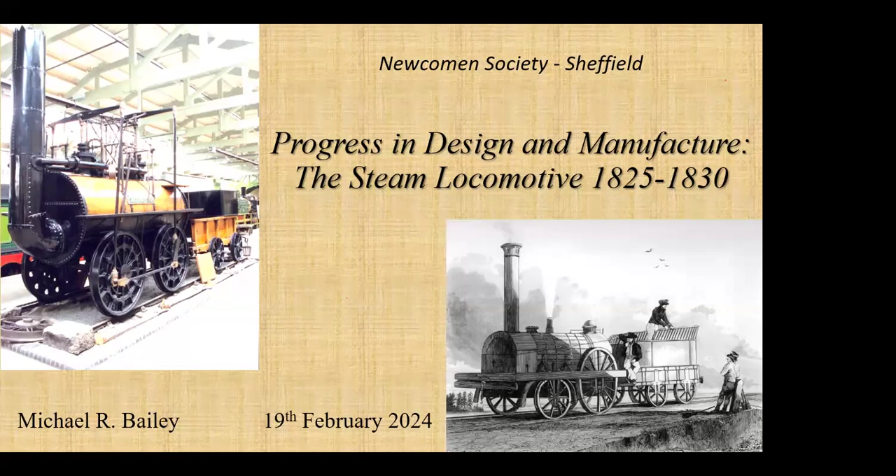So this is very much the story of Robert Stephenson and Company of Newcastle upon Tyne, because they were started up during this period, and they played a very large part, not exclusive, but very large part in this evening's story.

It's a cylindrical boiler with a flue passing through from the rear, where the fire grate is, to the leading end, leading up to the chimney, with 2 vertical cylinders set to the crown of the boiler, and the vertical action of the piston transmitted through crossheads guided by slide bars. The 2 cylinder actions are coordinated by the so-called endless chain, which links the 2 axles together, to stop the 2 cylinders getting out of sync.

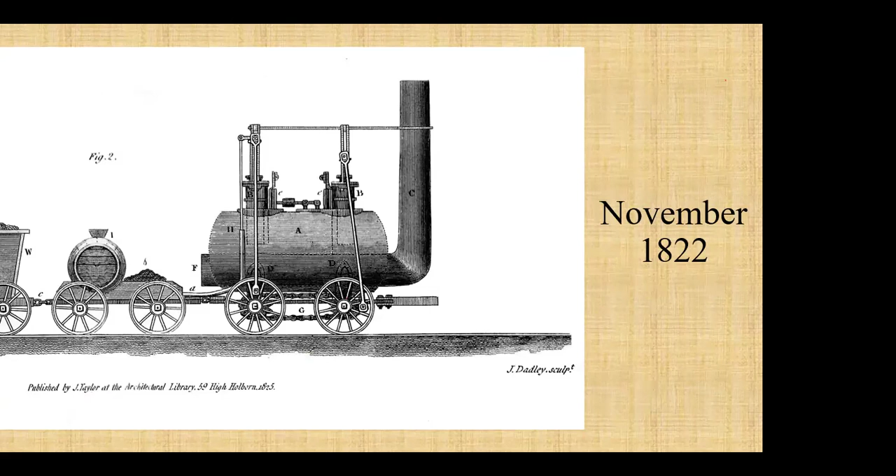So the Hetton colliery, a contemporary illustration of the Hetton colliery locomotive, again with the characteristics that we saw in the earlier one. The other point, incidentally, is that we're not using any springs other than the so-called steam springs, which Stephenson had introduced on the Killingworth line in the 18 teens. So they were still in use on the colliery line. We learned a lot about the Hetton colliery locomotives when we looked at the Hetton locomotive based at the Locomotion Museum in Shildon in County Durham.

In anticipation of the startup of the Stockton and Darlington Railway, there clearly was demand identified for manufacturing railway equipment, including and especially locomotives. And so the Robert Stephenson Company was formed in June of 1823. At first, they undertook contract work for customers at the Bedlington Ironworks, because the manager there was also a partner in the Stephenson company.

They leased land, I should say, just off Forth Street in Newcastle, and they began to build and fit out initial workshops between October of 1823 and August of 1824. To begin with, they had about 40 smiths, machinists, and fitters, and shortly after the works were declared open and in full use, the Stockton and Darlington Railway ordered their first 2 locomotives from the company on the 16th of September 1824. They ordered 2 locomotives. The good news.

The bad news is that they hadn't got a manager, because Robert Stephenson was in South America and George Stephenson suddenly became extremely busy because so many people approached him to undertake schemes for railways in various parts of the country, and he refused to say no. He kept saying yes, and therefore he burdened himself with an enormous amount of work. So George Stephenson wasn't on hand to supervise the beginning of the work on the locomotives.

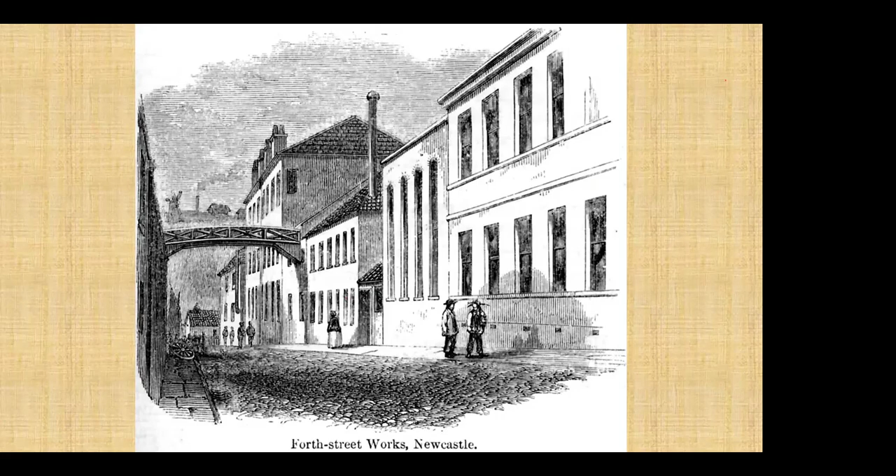James Kennedy was the other person that George Stephenson approached. He was a Scottish millwright who had quite a lot of experience with the fitting out of steam engines, which were marine engines on board various ships. And he was undertaking this work in Liverpool and other northwest ports. George Stephenson approached him and said he could do with someone of Kennedy's experience. Would he please come to Forth Street and undertake the work of manager to carry out the first orders that the company was receiving. So from that moment on, once Kennedy was installed, communication with Stephenson was by written word.

This remarkable drawing survives in the Tyne and Wear Archives. It is not only the first locomotive drawing that we know of, but it is also particularly important because it is a pre-production sketch, I should say, of a locomotive. It's written in Stephenson's own hand, and one imagines that he also prepared all the sketches that you can see there. What he was trying to convey with this amazing drawing is that he would like to coordinate the action of the pistons by using parallel motion rather than relying on the endless chain that had been the case with the previous locomotives that we looked at.

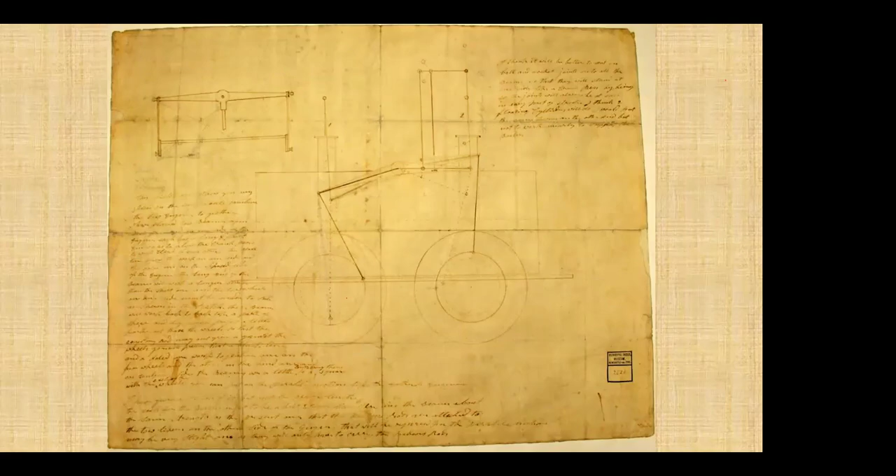Kennedy was left to interpret what it was that Stephenson was seeking to do. Not easy; you can't just use a sketch like this and suddenly produce a locomotive that fits all those requirements. The next drawing that has remarkably survived is another pre-production sketch. It was prepared almost certainly in 1824. Now, this is preserved in the National Railway Museum in York. It shows two alternative arrangements for parallel motion. On the left side is William Freemantle's grasshopper motion, and on the right-hand side is James Watt's parallel motion.

There is no text that accompanies this drawing, or none that has survived. And so we are left to wonder who prepared it. It is my belief that it was prepared at Newcastle to send to Stephenson with an accompanying letter saying, which one do you want? Which presumably means that Kennedy was the drawer of this drawing. Now, it could have been Timothy Hackworth, but we have no historical record confirming either way who produced it.

The parallel motion was his attempt to interpret Stephenson's requirement. It does away with the endless chain and provides the link between the two driving axles with coupling rods. But there are no springs indicated. In other words, they sought to abandon the steam spring. Therefore, how would they overcome the problems of the uncertain track of the Stockton and Darlington line?

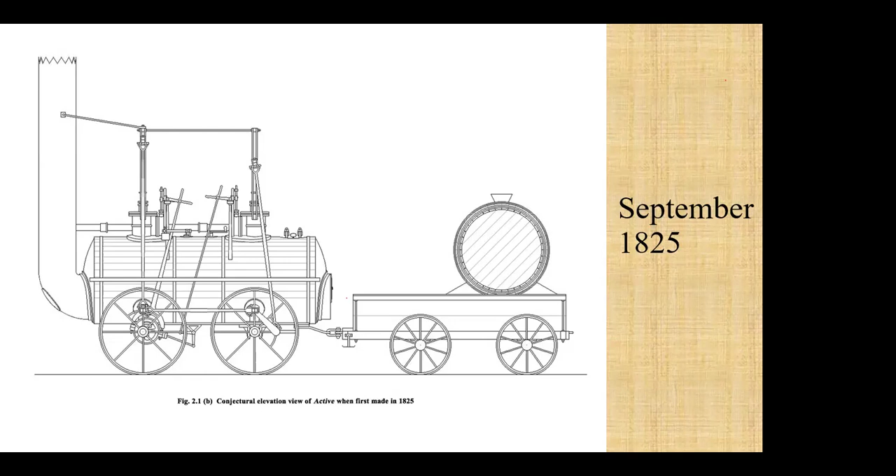Now, you cannot take sketches and use that as evidence, but it is comforting to think that the guys who were there on that opening day actually chose to illustrate the locomotives in this way. So it drew about 80 tons and it carried about 700 passengers. These are the accounts of the day that we've fallen back on. It drew 30 wagons between Darlington and Stockton, and on its approach to Stockton downhill, it actually achieved 15 or

16 miles per hour. Now, a great deal of this success was down to George Stephenson's elder brother, James. James was an experienced driver who had been at Killingworth, moved across to the Stockton and Darlington to set up the driving skill on the S&D, and no doubt chose to teach new drivers to supplement the work that he was doing to build a force of drivers for the growing railway company.

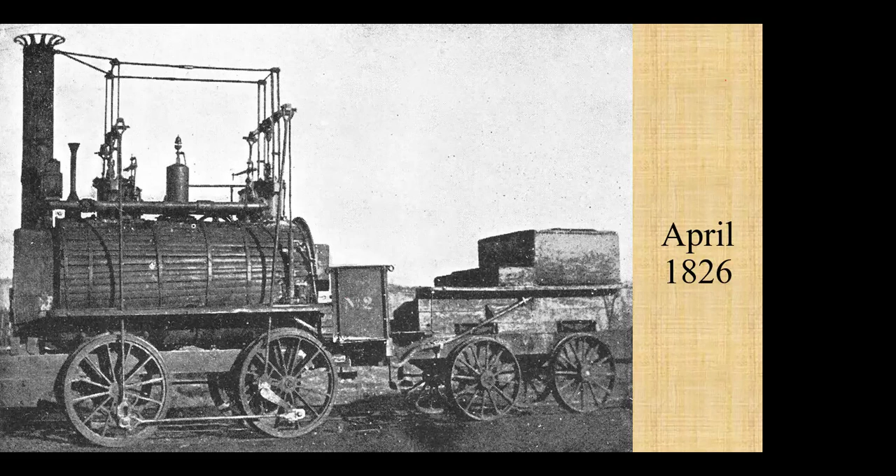I'm going to read to you two extracts from the minutes of the directors' subcommittee. The first quote is shortly after this loco arrived, just a couple of days. "This committee feel very much dissatisfied with the manner in which Messrs. Stephenson and Company have delivered the last locomotive engine on account of its imperfect state, the smiths having been employed a whole week before it could be got to work." That's a pretty damning indication that was communicated to the Stephenson Company.

And the second quote, just a week or two later, the directors requested that Robert Stephenson and Company, in any engines they may furnish us with, not send any engines with new and experimental apparatus, but such fitting up as has been tried and approved already. So they were in deep trouble because the geometry of the parallel motion had not been proved.

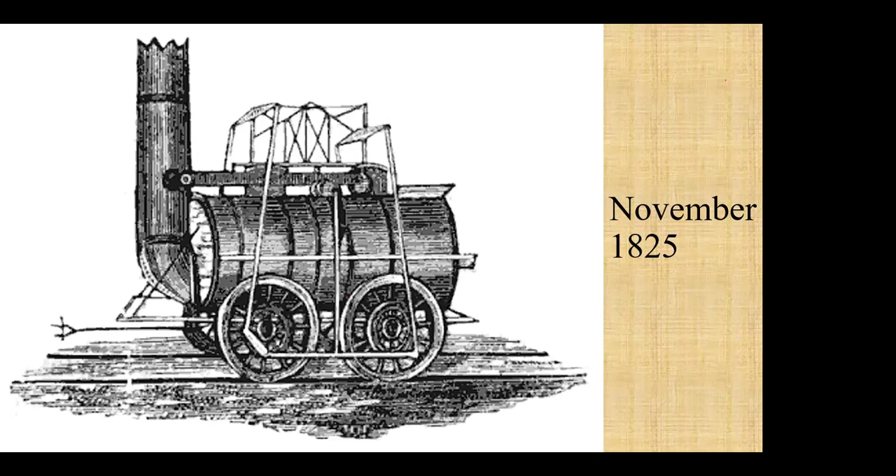Not only the geometry of that, but also if we take fairly closely what the artist has shown us here, the valve motion driven by the connecting rod, rising up from the center of the connecting rod, is also fitted to the top side of the boiler in a way that looks questionable, to say the least. So they had a lot of problems. They managed to fix it eventually, but it left a sour taste in the mouth between the company and the manufacturer.

Now, this drawing has been prepared by Ernest Forward, who was the curator at the Science Museum in the 1920s and 1930s. He did a lot of research into the early locomotives, particularly numbers 3 to 5. There were 5 locos in all. His best interpretation is shown in this drawing, which was published in the Engineer in October of 1941.

Now, he's indicated some of the wheel improvements. I'll come back to that subject. He's shown the tilting sleeve for the rear axle and various other components, which more or less fit in with what we now see on the locomotive as it has survived.

The reliability of locos was totally dependent upon the drivers and the maintenance men. James Stephenson again led the way. He managed to drive not only the first locomotive, which, by the way, was known by all the drivers as the Active. That was the name. It didn't carry that name, but certainly the drivers called it the Active. And that was a name that stuck all the way through its working life, right through until its preserved life. It was always known as the Active.

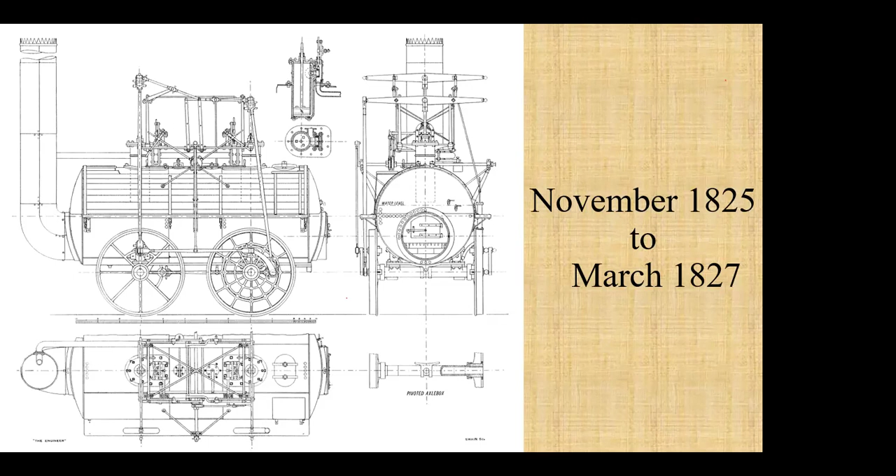Sadly, we're not allowed to look at the outside plates of the boiler because allegedly it has got asbestos dust. Heaven only knows where the dust could have come from, but that is what was said by the NRM. Therefore, we had to live with it and examined the boiler from the inside. And it's that difficult. You have to bury your head inside the boiler and use a telephone camera on a selfie stick. Believe you me, that's very difficult to do, to gain as much knowledge as we can about the formation of the boiler.

Now, in this view, the center of the illustration is the crown center line, and the left and right sides are the bottom center line of the loco. So the whole thing has been flattened out to illustrate the formation of the boiler. Now, the method of construction was that the boiler plates were longitudinal, and with each ring, as it was built up, the plates were riveted to the outside of the previous edge. And it was gradually rolled and new plates riveted. So you get this progressive, I hesitate to call it cylinder, because by the time you've overlapped 7 times to go round, it's not cylindrical. And that really is the point. It was a peculiar shape, not cylindrical. And therefore, nothing fits precisely.

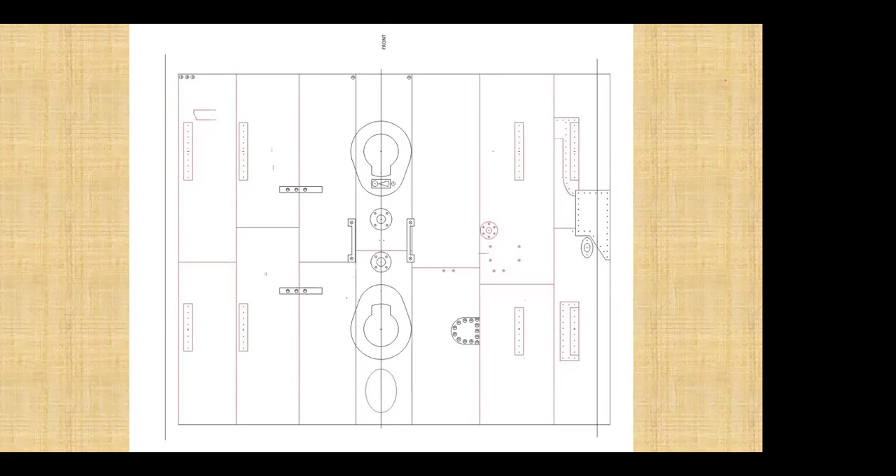Now, so much for the initial engines that by the time we get to the November of 1827, a new form of locomotive appeared from the Stephenson Company. There's very little in the way of paperwork to accompany this drawing. It could be that Timothy Hackworth initiated this different approach, because it was fundamentally different. The cylinders are buried into the rear plate of the boiler, working horizontally rather than the twin cylinders in the crown, as we saw previously.

So the whole geometry is totally different, and the drive is on the leading axle only. The rear axle is an axle which is coupled to the driving axle. Fine, this was all very well, but when it was delivered, it was found to be too heavy. It was too ambitious. And the Stockton and Darlington, and Timothy Hackworth in particular, had to decline the engine and ask for it to be taken back and rebuilt with a third axle. And so it didn't operate for very long before they reached that conclusion.

Now, I should say that throughout these early years, there were difficulties with the weight of each of the locomotives, and also with the state of the track. It needed a great deal of maintenance. It was being punished by the action of the steam locomotives.

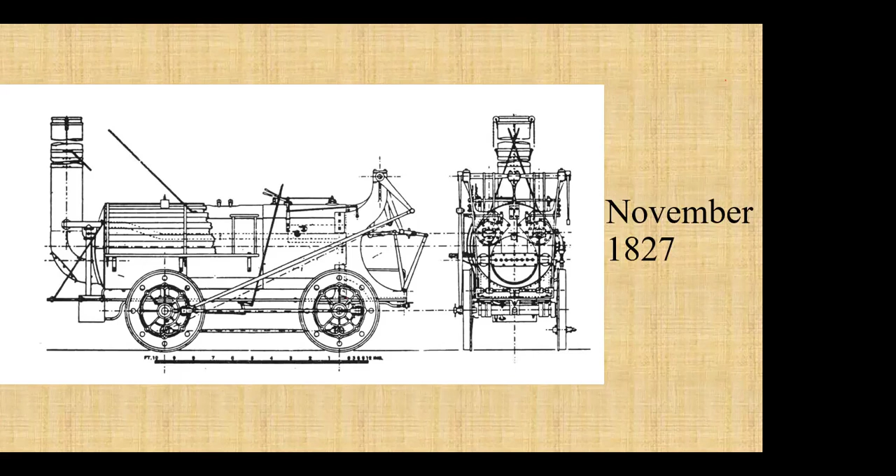So that takes us to the end of 1827, and then a remarkable event took place, and that is that Robert Stephenson came home from America. George Stephenson, his father, was so pleased to see him because he could take over from his father the development work of the locomotive so desperately needed. And so, having shed himself of his concluding responsibilities from his work in South America, from the January of 1828, he took on from his father the responsibility for developing the locomotive for the forthcoming mainline purposes, in addition to the freight purposes on the Stockton and Darlington and the railways.

Robert Stephenson, a very, very talented engineer, began what today we would call a research and development program, in which he would investigate each aspect of the locomotive on its own and try to improve what it did and how it did it. This is in marked contrast to his father, who always took an empirical move to try and improve things. George Stephenson would say, if it works, well, do it again, but do it bigger. Whereas Robert Stephenson said, how are we going to improve the locomotive?

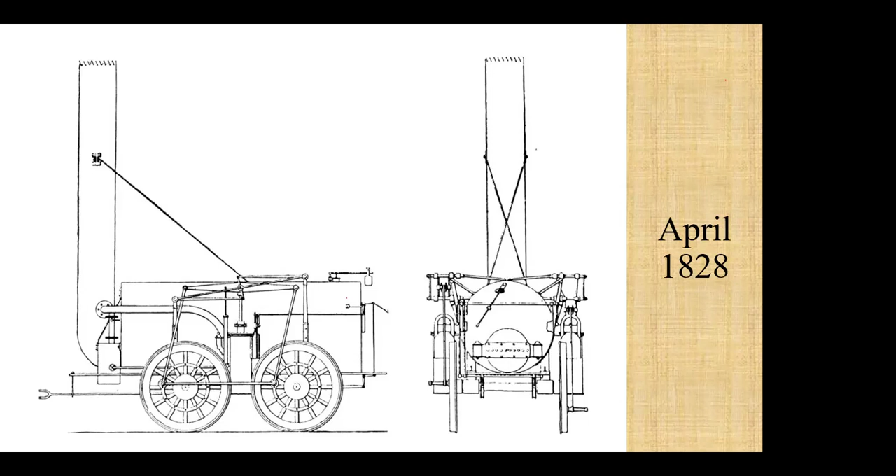The next loco with which Stephenson had the opportunity of trying out his ideas was the loco that was destined originally for the Liverpool and Manchester Railway, but subsequently went to the Bolton and Leigh Railway. This is the Lancashire Witch. And the Witch introduced something which is brand new and very important, and that is plate springs.

Now, plate springs had been first used on the Killingworth wagonway. They were tried out on one of the wagons there to see how they worked and how robust they were. They did work, very successfully. In fact, so successfully that the first person who asked to go and see them was Timothy Hackworth. And we even have his expenses claim for going to Killingworth to see the plate springs. And they were adopted by the Stockton and Darlington Railway and also on the Lancashire Witch.

The locomotive here has two flues, not a return flue in the way that I'll explain just coming up, but two quite distinct flues in parallel with each other. And the flue gases were gathered together at the front end into one bulbous chamber that fed then to the chimney. Again, it's got wooden wheels with the wrought iron crank ring.

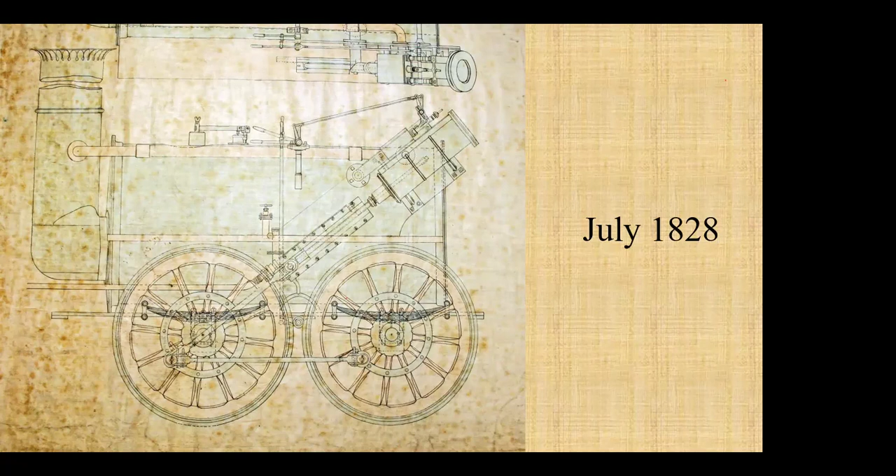The other person that I've got to mention, because he's so important, is William Hutchinson, who was the leading foreman at the Newcastle factory. In fact, I think today we might call him the works manager, but he really was a very experienced man. So he was able to carry out some of Stephenson's ideas by saying to Stephenson, I can manufacture this, but I can't manufacture that. We can do this, we cannot do that. And the three of them, the designer, the leading foreman, and Stephenson himself, formed a kind of triumvirate for all this development work. And this is some of the fruits of their work.

Now, for another most important part of the story, we've got to take a step back to November of 1827, to the work that Timothy Hackworth was doing. Hackworth was the locomotive superintendent of the line, and therefore responsible for the engineering of its locomotives. And a locomotive was offered for trial from the outset of the line in 1825-26. This was a locomotive also built in Newcastle and was known by the men, I suspect, by the sort of noise it made. It's called the Chittaprat.

It was unusual in as much as it had four outside cylinders. It kind of worked, but I think the maintenance was a bit excessive. And so Timothy Hackworth declined to accept it, but kept the engine. I don't know what the arrangements were, but he kept the engine. And what impressed him so much was the boiler, because the boiler had a return flue, and this increased the heating surface available for use with the loco quite considerably.

So what he said is, right, I'm going to use this boiler. I'm going to extend it by adding another ring to the front end, and I'm going to place it on six wheels rather than the four wheels that the Chittaprat had come with. And so this is the loco that was drawn at the time. You can see the return flue arrangement that it's got there. You can see the vertical outside cylinders, and you can see also something else that he borrowed off the Chittaprat, and that is the two-part wheels.

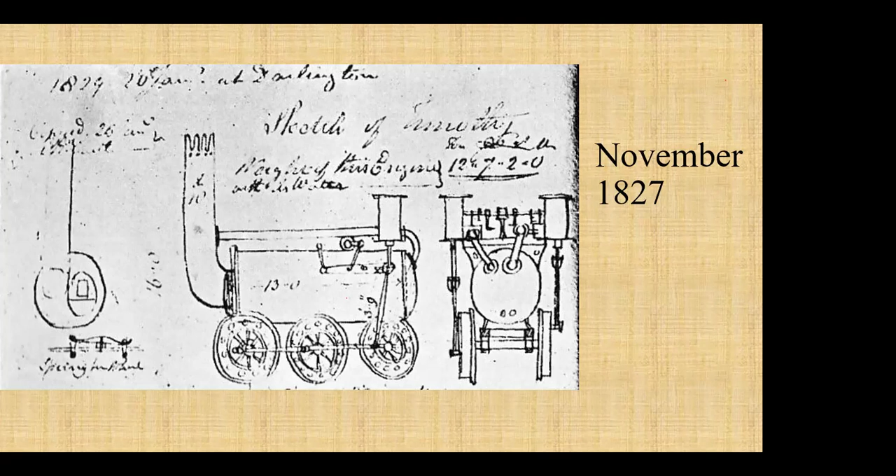Now, all this is by way of introducing what happened to our old friend, the Active, the locomotive that started the Stockton and Darlington line. Because in the July of 1828, the boiler failed badly. The flue and the boiler barrel were badly damaged, and sadly, the driver, John Cree, was killed. This was on the 1st of July, 1828.

So Hackworth then had the decision to make. What should he do with it? Should he just scrap it or try something else to replace that badly damaged boiler? He decided that on the basis of the increased heating surface of the Royal George, that he would replace the boiler on what had then become number one and replace it with two return flues.

Now, this really is brave because, yes, you get a much increased heating surface, but somehow you had to understand how to fit two return flues into the boiler. There wasn't much room. The original boiler was 4 feet in diameter. And so he went to Newcastle for discussions with the Stephenson Company, or no doubt with the boilermakers themselves, and said, this is what I want to do.

And they played around with it for quite a little while and came up with the idea of putting on a replacement boiler, which was slightly larger, 4 feet 6 inches diameter. And this enabled them to have enough room inside the boiler at the return end of coming back with two return flues. And it's in this form. This is the way that Peter Davidson, who prepared all these drawings, it shows how it could fit within that diameter boiler.

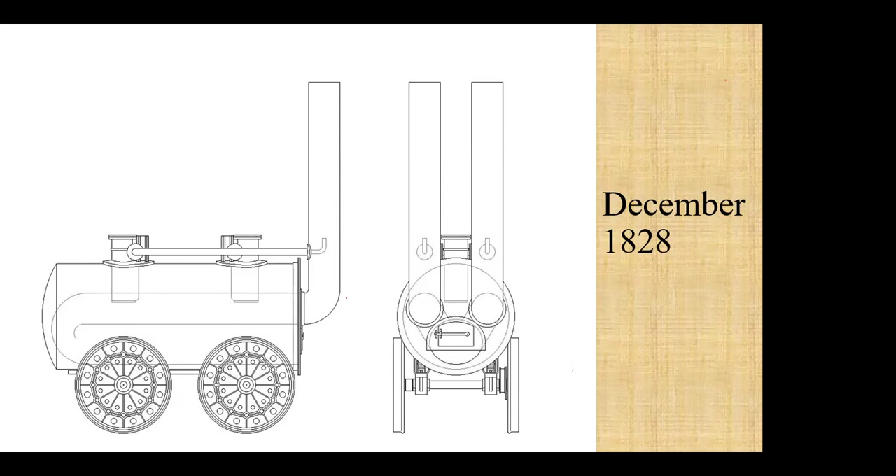Right, let's take the story on a bit further. The Experiment, as the loco we saw earlier, was subsequently rebuilt onto three driving axles. It was fitted with two-part cast iron wheels and then operated more successfully this time because it didn't tear the track to pieces. So that locomotive was eventually an important part of the fleet of the Stockton and Darlington line.

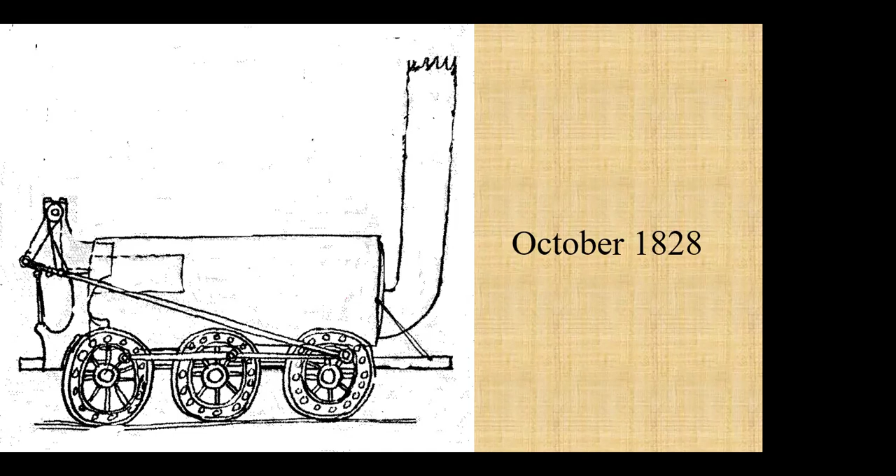As time moved on into 1829, then, of course, other orders were taken, and the benefits of the new knowledge that they had gained started to be incorporated. This, again, is an original drawing that survives in the Tyne and Wear Record Office. This is travelling engine number 15 for the Tredegar Iron Company in South Wales. It has a return flue.

It has the plate springs, and it has the cylinders now for the first time fitted to the side directly onto the leading axle. And the important point here is that with springs, it can accommodate the direct transmission in this manner. The wheels are the two-part cast iron wheels, which it carried.

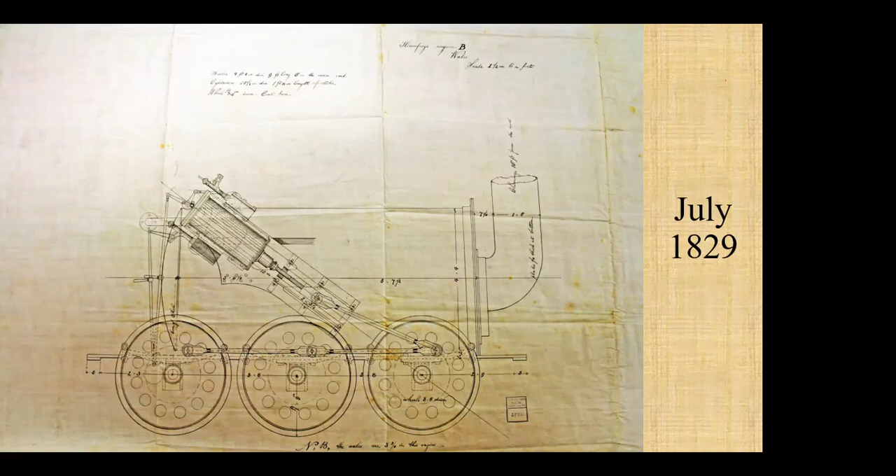But now you'll notice that I'm jumping from one activity to other activities. There were two production lines in the factory: one was the progress being made with the traditional coal-moving engines, and the second production line was with the experimental engines destined for the Liverpool and Manchester railway. So in addition to this sort of locomotive being made at one part of the workshop, we move on to further locos that Robert Stephenson was very much involved with.

He looked at steam generation, as we saw earlier, but on this particular occasion, he looked at the sort of boiler that had been employed on some of the steam vessels, again, over in Liverpool. He approached the William Laird Company of Birkenhead and obtained some ideas for these small vertical boiler locos. There's two boilers side by side there with two chimneys and two exhaust pipes and so on. So there it is, fitted with plate springs and wooden wheels and wooden and iron crank rings. That was known as the Twin Sisters.

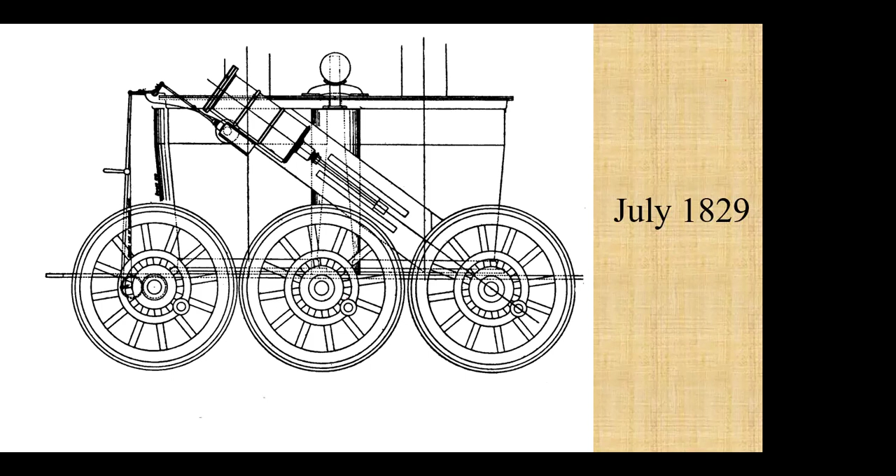In addition to that, another vertical boiler, marine engine type boiler, was put on another engine. This was for William Forman of South Wales in Penydarren, and not quite the same in the way it's been portrayed, but nevertheless the principle is exactly the same. And you've got a better indication there of the plate springs, inclined cylinders, and the crank rings as well.

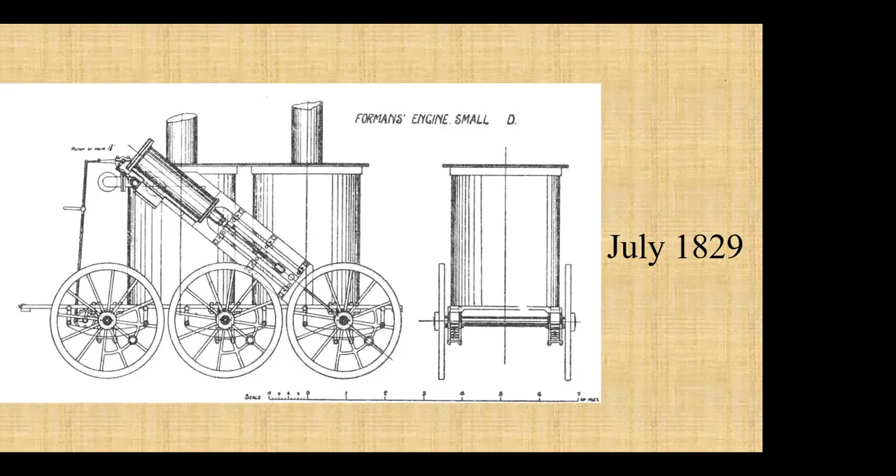Now, the next locomotive was, as it were, one of the traditional runs. It's a locomotive for a mineral line. It was for the Stockton and Darlington. It was named Rocket, which is interesting in itself. And it had a return flue, plate springs, direct transmission again, two-part cast iron wheels.

And in addition to the Rocket, which was duly delivered to the Stockton and Darlington, the next engine was also a very similar arrangement, and it was travelling engine number 17, which was built again for the United States, for the Baltimore and Ohio Railroad. Now, I'm very attached to this engine because several years ago, I led an expedition to try and find it, because on its delivery run from Newcastle to Liverpool, before going across the Atlantic, the ship sank. And I assumed that the locomotive had been taken down to the bottom of the ocean.

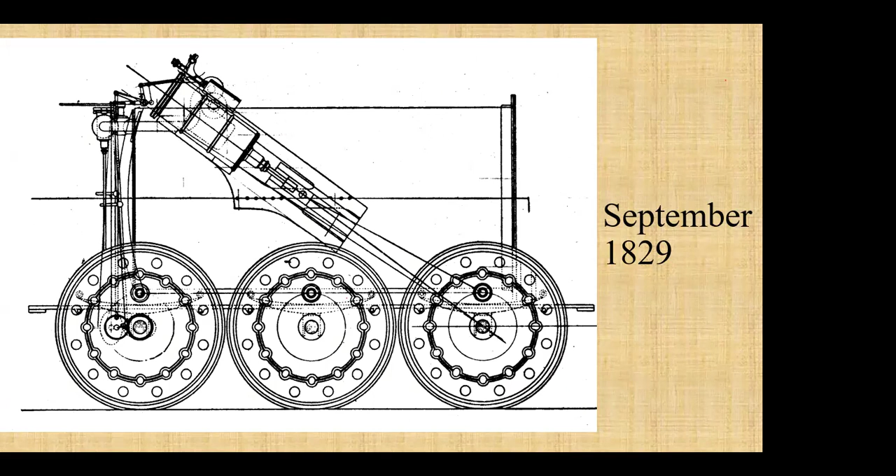But the main activity in 1829 was a much lighter locomotive that was built in anticipation of the Rainhill trials. Now, Robert Stephenson headed up the consideration of the design for the Rocket, with George Phipps doing the necessary drawings, and William Hutchinson undertaking the necessary manufacture and using all his experience. They were weight limited to 4.5 tons for the locomotive. But the most important feature, of course, is that instead of a return flue or twin parallel flues, the suggestion of Henry Booth to use multiple small tubes was accepted.

Now, Booth is always known to have suggested the use of multiple tubes, but it's one thing to have a notion, it's another thing entirely to carry it out. Because just imagine: oh, by the way, why don't you just use multiple tubes and a tube plate? But then you make it work when it's never been done before. That was the challenge, and that's where William Hutchinson came in.

Yes, they eventually made a watertight boiler. They had to put in 3 different kinds of stay inside the boiler to prevent it expanding unduly. And of course, having made yourself a steam-tight boiler, you then got to think of, well, where do I put the fire? So they had to invent, in inverted commas, the firebox.

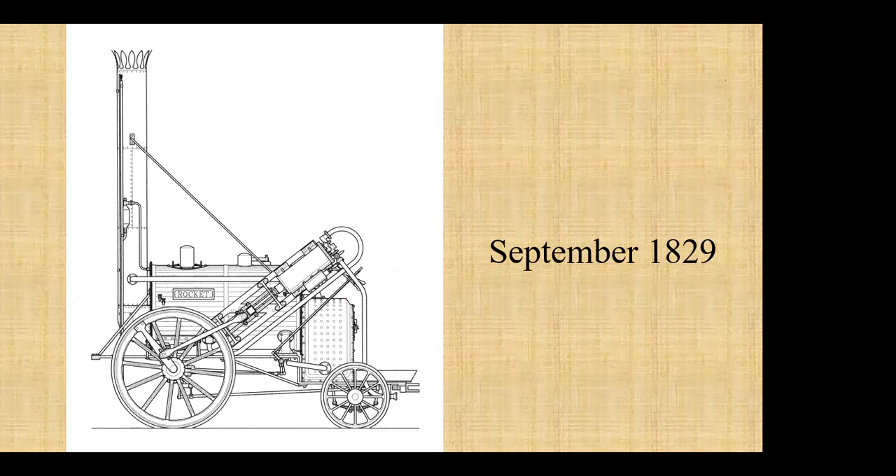So an examination of the boiler of Rocket is itself very interesting. Now, this is a drawing Clitheroe did for our report a few years back. It actually shows it as it is now. So for the moment, ignore the smoke box at the leading edge. We just have to look at the boiler of Rocket and how the firebox would have been had it survived.

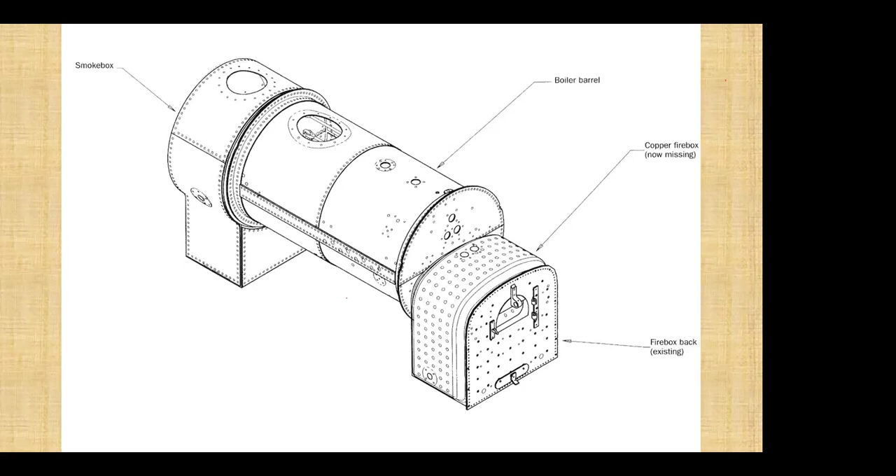The important thing here is that the iron boilers from the previous generation of locomotives were abandoned. And the reason for this, we now realize as a result of the Locomotion study, is that the quality of the wrought iron was very poor. It had 7, 8, 9% impurities within the wrought iron, which would have contributed to some of the failure of the boiler that had occurred on the Stockton and Darlington line. And so what Robert Stephenson decided on was to obtain boiler plates from Staffordshire instead of from Bedlington.

And the design of the boiler now has rings rather than horizontal plates. So you've got two rings here, and the two hemicircles, if you like, for the boiler plates were placed one above the other, butted on top of each other. And to secure that, there was a strap run along the join, you can see in the center of the boiler there on either side. And that's a form of butt strap type of boiler, worked very well indeed.

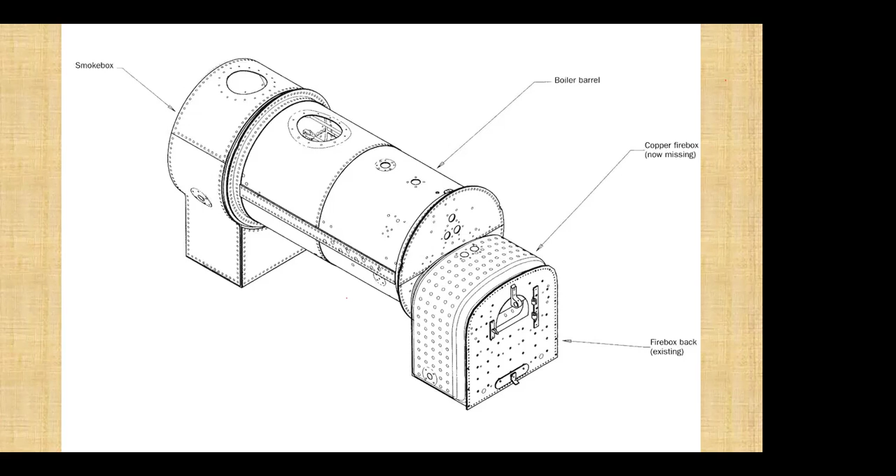And well done to William Hutchinson for achieving this design of boiler using techniques which are so new that he was able to put it into practice just by intuition. And the firebox, of course, was added on in the way that I've just been indicating. So we all know what happened. Rocket won handsomely at Rainhill. And as a result of that, the Liverpool and Manchester Railway then decided to order, first of all, 4 more locomotives from the company.

Again, wooden driving wheels, although the crank ring has been rather strengthened there, suggesting they still had problems with the original wooden wheels. Now, these 4 locos were called Meteor, Comet, Dart, and Arrow. Now, I think it was with either Dart or Arrow that they carried on making trials on the Liverpool and Manchester line. This is the beauty of this close association between Robert Stephenson and Company and the Liverpool and Manchester Railway, because the company used the railway as a test bed to try out innovations on the locomotives, and giant steps were made as a result.

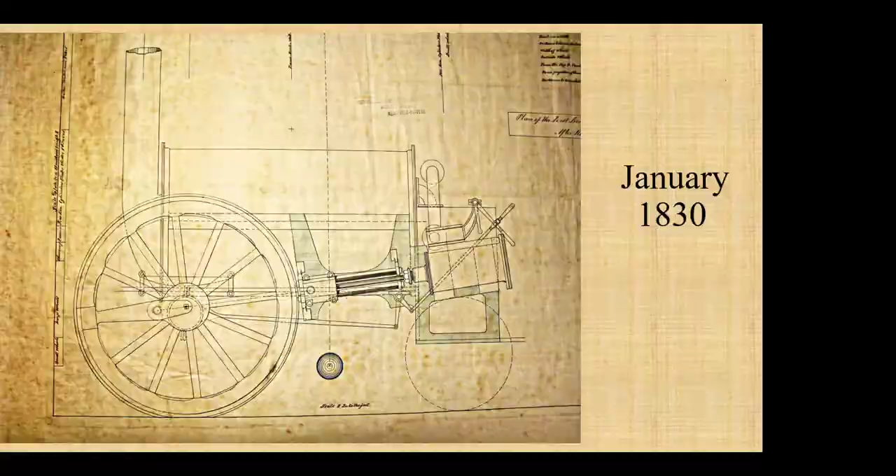So with Dart and Arrow, they decided to see how they could improve the climbing of inclines, because they were anticipating severe difficulties with the next order that they had received, which was from the Canterbury and Whitstable Railway. Now, this drawing on the left-hand side is a drawing which has survived, one of George Phipps's drawings, which has survived in the National Railway Museum. In fact, there are two drawings like this.

The model was owned by Edward Fletcher, who subsequently became the chief mechanical engineer of the North Eastern Railway. He it was who was an apprentice at the Robert Stephenson Works. He brought Invicta to Whitstable, and he subsequently trained the drivers that were to take it over from the time he left.

Now, what we can see there is a locomotive which is very similar to the Rocket and the modified Rockets, but it's a four-coupled engine with coupling rods. Now, the reason for this is that it had to climb the steep incline from the harbour in Whitstable up to the upper level of the line before it proceeded on its way south to Canterbury. And so it was quite a demanding challenge to enable the locomotive to achieve that. So again, we are blessed with a set of drawings and this wonderful model to have worked with.

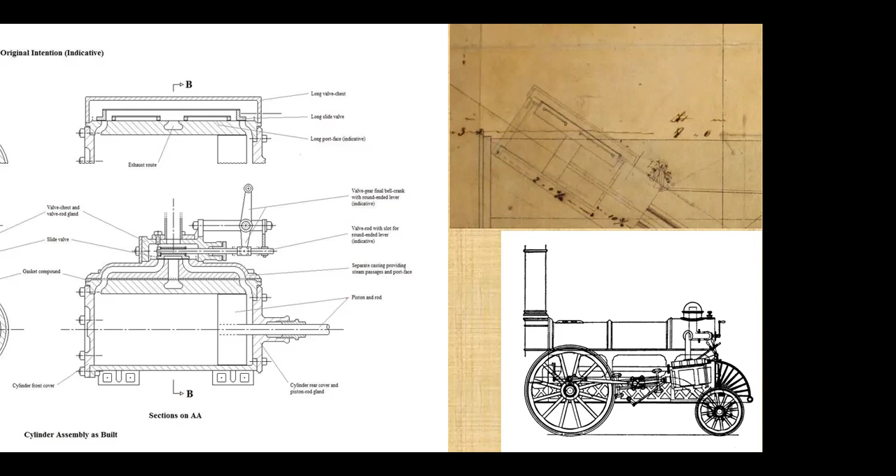Now, on the right-hand side, just jumping ahead a few weeks, we come to the Northumbrian locomotive, which has been shown with a long travel valve there, suggesting they managed to overcome the problems that they had with Invicta, but again, without the detail we can't understand too much about that. So development work carried on on the Liverpool and Manchester Railway rapidly through 1830.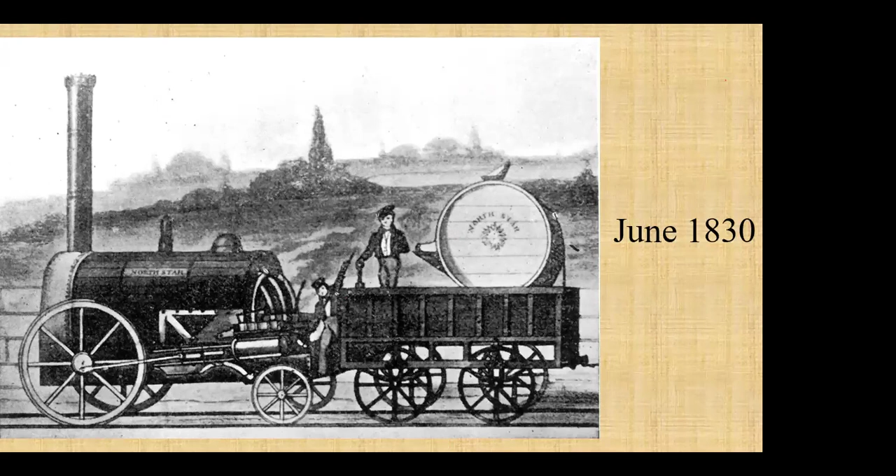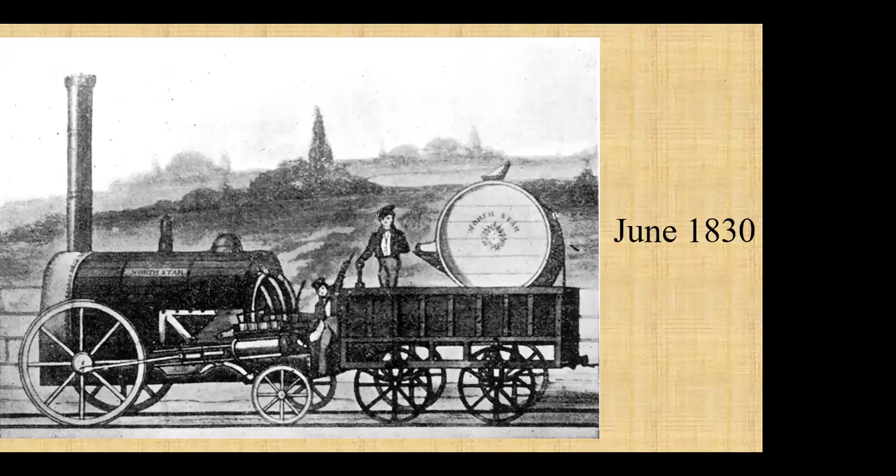The first thing that they did was to realise that the bulbous front ends of the loco could be much improved by putting in a proper smoke box, which was a vacuum chamber good enough for the exhaust to pull the air through the tubes and to stimulate the fire in the firebox.

Again, on the North Star, we've got the external firebox still being fed to the boiler itself with tubes from the crown. We've got the wooden driving wheels and the near horizontal cylinder action. There are two locos made then, the Phoenix and the North Star.

And the next loco, very soon afterwards, these were coming off the production line so quickly by now, all because of the work that Stephenson, Hutchinson and Phipps were achieving. And this time, with the Northumbrian, the firebox was incorporated within the boiler. That was a big step to take out those external pipes and the heat losses that would have resulted.

They added on the firebox to the boiler barrel, and also, of course, the smoke box at the leading end. Also, the framework has been considerably strengthened because of the additional weight involved. The weights had to be very carefully balanced for the locomotive to operate satisfactorily. And so that was the Northumbrian, which was finished in August of 1830.

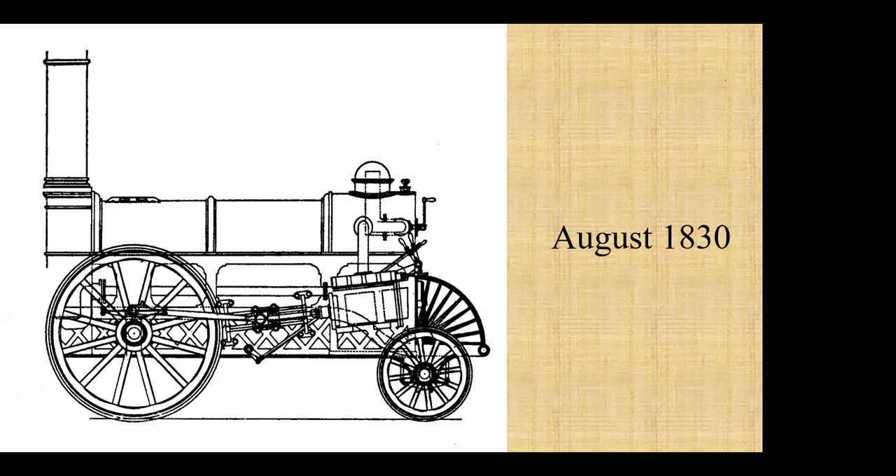There was a subsequent locomotive, the Majestic, but that came along after the next locomotive, which was a remarkable change in the design that had been achieved by the triumvirate. Stephenson looked at how the locomotive could be improved.

There's all sorts of stories about the crank axle on this locomotive not being original. It was pinched from Hackworth's Globe and one or two other locos. But in fact, this must have been planned well in advance because of the manufacturing difficulties that they had to overcome.

The cylinders were moved from the rear to the front. That was the first change. And that meant that the driving wheel was moved from the front to the rear, and the carrying axles correspondingly went to the front under the smoke box. Now, the cylinders were inserted at the base of the smoke box, and thus, again, from a thermally efficient view, it was much improved. Inside motion was all very well, but it did require the manufacture and machining of the crank axle, and that was the key.

So William Hutchinson it was who had the task of working out how to manufacture, how to forge, and how to machine the crank axle. It must have taken weeks and weeks. You could not do this very quickly. How to set up with the rather primitive machine tools that he had at his disposal, and yet he managed to work out how to do this and achieve it by the September of 1830.

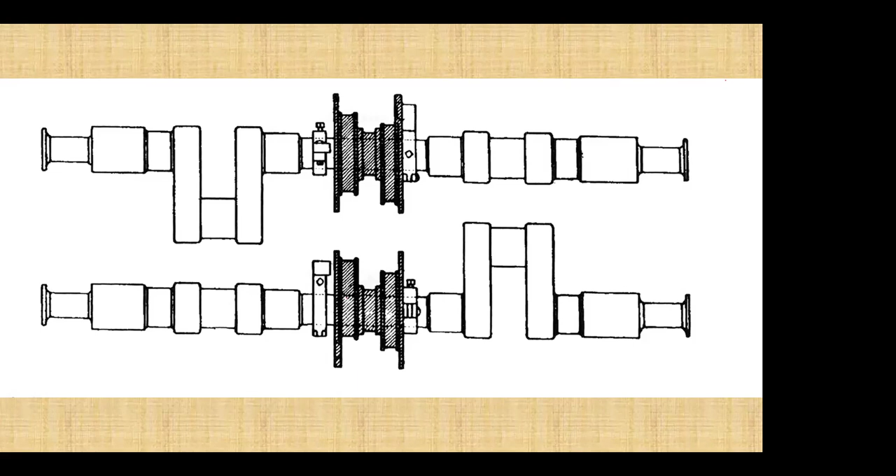The other thing that they improved no end was the introduction of a much superior frame. This was a frame made from oak, plated on either side with wrought iron, the so-called sandwich frame. The inside frames were wrought iron, but the sandwich frame became a stalwart with subsequent designs of locomotives for many years afterwards. And so the Planet arrived in Liverpool in the very same week as the opening of the line on the 15th of September 1830.

Now, Stephenson had made the promise that he'd have a developed steam locomotive available for the opening, but didn't quite make it. It was finished on the 3rd of September, put on board a ship, raced around Scotland, down into the Mersey, and was still on board ship on the 15th of September.

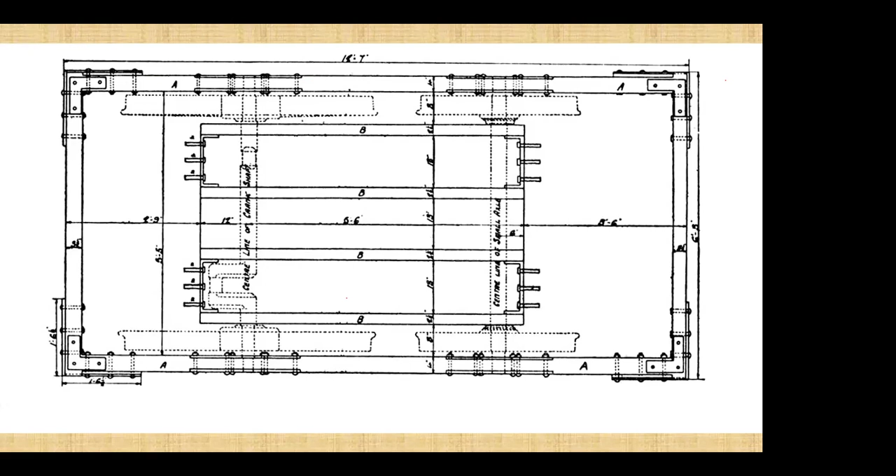But it was a damn good effort, nevertheless. And here is our replica at Manchester, and we learned a great deal about the early design of Planet as a result of this manufacture. We're indeed very proud of this locomotive.

Well, we have it. 5 years from the Locomotion on the Stockton and Darlington Railway, and 5 years later we have Planet on the Liverpool and Manchester Railway. It is a truly remarkable piece of mechanical engineering history, and Robert Stephenson's part in it. He came home and he worked on all the improvements that we discussed. In just 3 months, he produced Planet. That is an incredible piece of engineering history. Very much indeed.